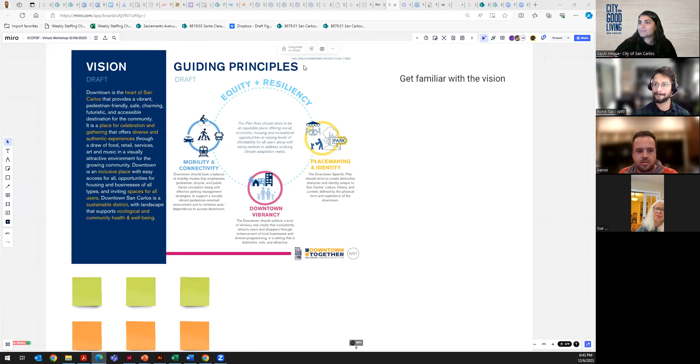Our vision is that we want to make sure downtown San Carlos is the heart of San Carlos City, and it provides a vibrant, pedestrian-friendly, safe, charming, futuristic, and accessible destination for the community. It is a place for celebration and gathering that offers diverse and authentic experiences through a draw of food, retail, services, art, and music in a visually attractive environment for the growing community.

Downtown is an inclusive place with easy access for all, opportunities for housing and businesses of all types, and inviting spaces for all users. Downtown San Carlos is a sustainable district with landscape that supports ecological and community health and well-being.

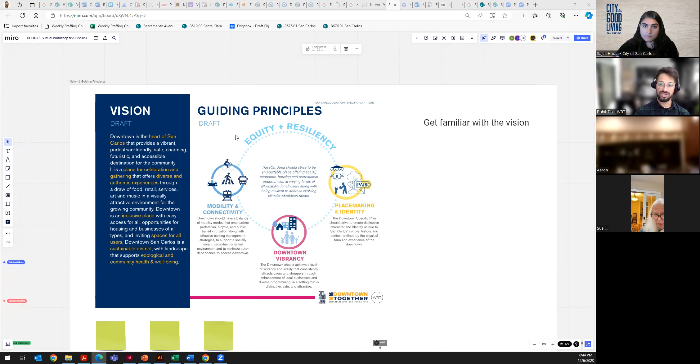This vision we summarized into four guiding principles, which include downtown vibrancy, placemaking and identity, mobility and connectivity, and an overarching theme of equity and resiliency across all three principles.

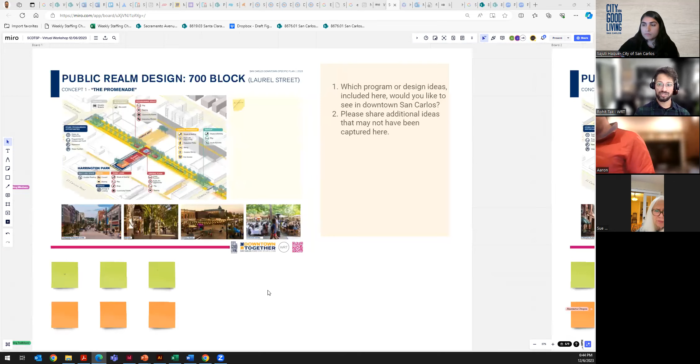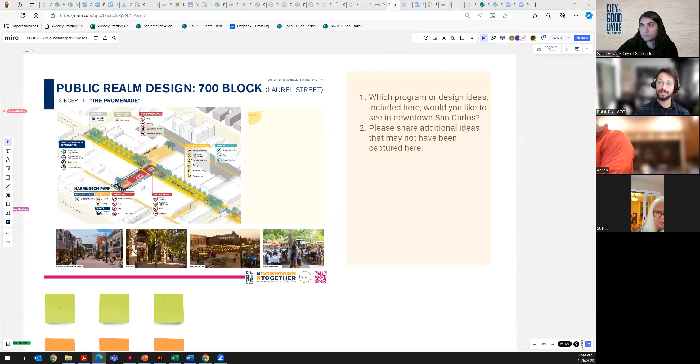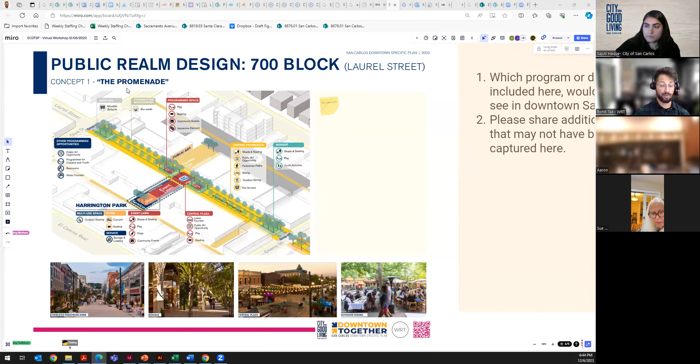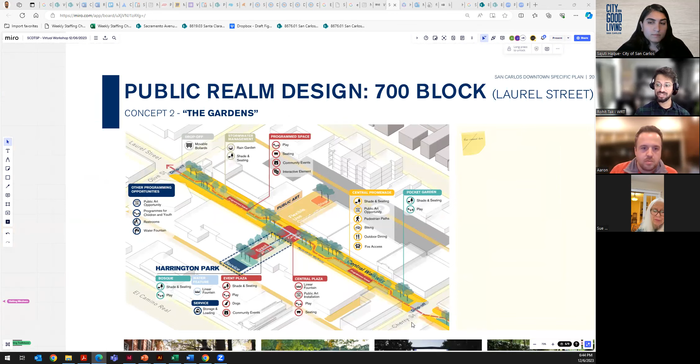To translate that into the physical space design, this slide talks about the transformation of the 700 block into a pedestrian plaza. As explained in the previous presentation, we have two options for the pedestrian plaza. First is the concept of creating a promenade, and second is creating a series of gardens within the 700 block, especially between Olive Street and Cherry Street on Laurel.

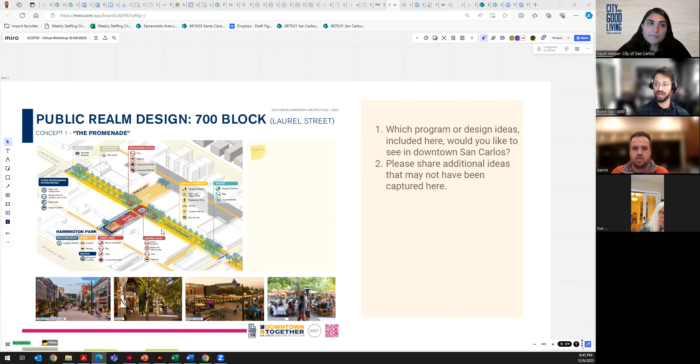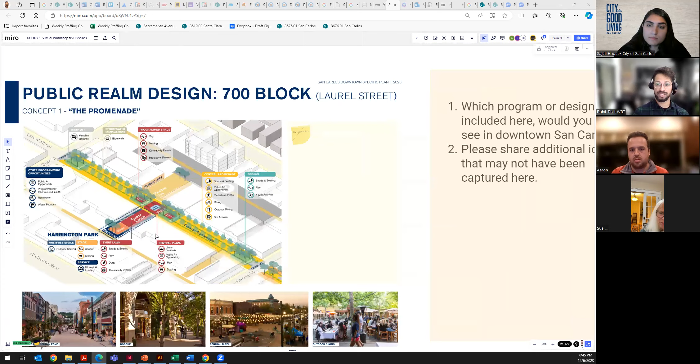I'll pause here, and we have a question for you to give feedback. Which program or design ideas included in this concept would you like to see in downtown San Carlos? And if there is anything missing that you need us to consider, you can comment on some of those ideas and activities as well. I'll zoom this in for the promenade concept. My note taker is Sajuti, and she will be typing all the comments and feedback you're reporting.

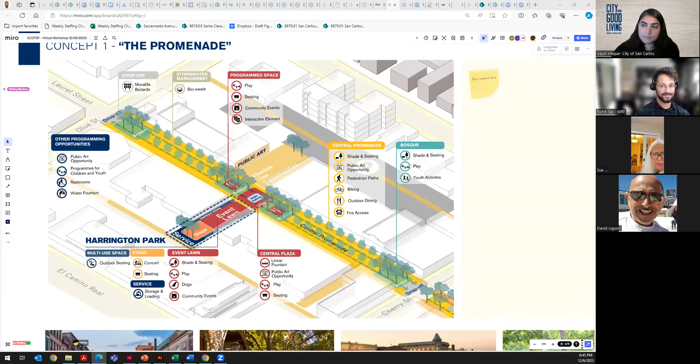This is David Liguori. Hi David. Hi, I hadn't thought about the tree grove idea down the middle, but seeing what you guys have come up with, some of these ideas, I really like that. It's really attractive, adding a bunch of green there and shade and interest down the middle, as opposed to just one long straight alley. Breaking it up like that is a really attractive idea.

As I mentioned a few minutes ago, with a 2-year-old, it would definitely be great to have some kid-friendly stuff along Laurel Street. The current Harrington Park is kind of dark and damp, and there's not a lot of good kid activity or infrastructure there for when we want to go down there as a family. That kind of kid-oriented and youth-oriented program would be something our family would be interested in.

Both good comments. Just to summarize, David's point was the shade factor introduced in these intermittent stages along the corridor is something preferred. And Aaron, to your point, wherever you see the play icon here, these are the areas where some child-friendly activities are being introduced to make this space inclusive of all ages, especially here along the park near the water fountain. But the point is noted—some programs where children can play and recreate could be introduced along the promenade.

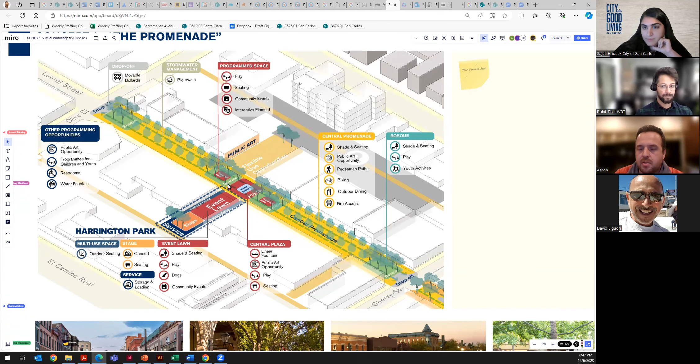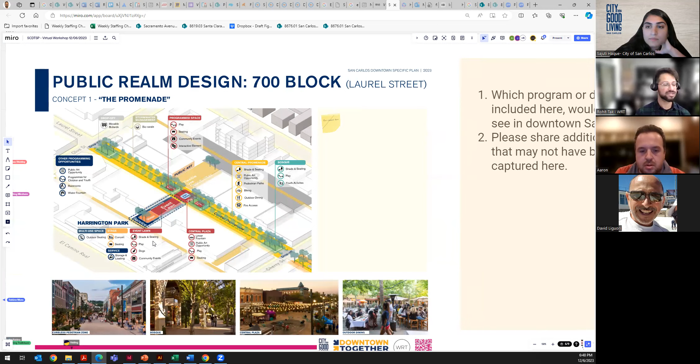Rohit, are we commenting on just the promenade concept right now? Yeah, so we have boards dedicated to different topics. For this board, we are commenting on the promenade concept, but if you have anything that goes in line with what we're discussing, please feel free to share.

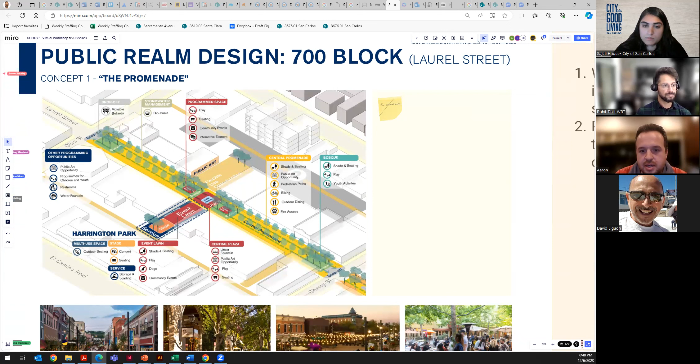This is David again. I like Aaron's idea about kids' stations in the promenade—little play areas scattered about where families can hang out with the kids. That would be wonderful. Our kids are just two, but I see lots of comments on Nextdoor about how there's no longer anything for teenagers to do. So if there was stuff that engaged youth of all ages, I think that might help create that kind of inclusive environment where people want to come hang out.

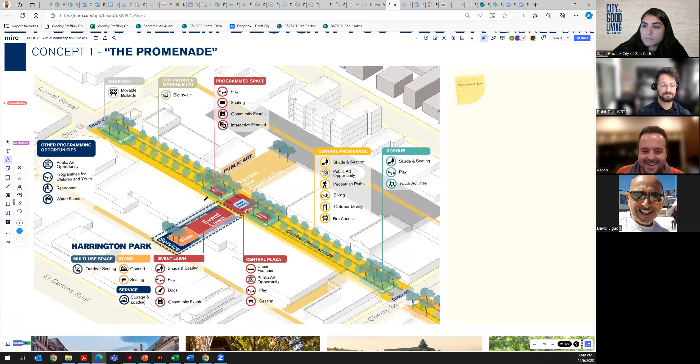You could put a boba tea kiosk in the middle of the promenade. Teenagers would love that—this lounging area, yeah.

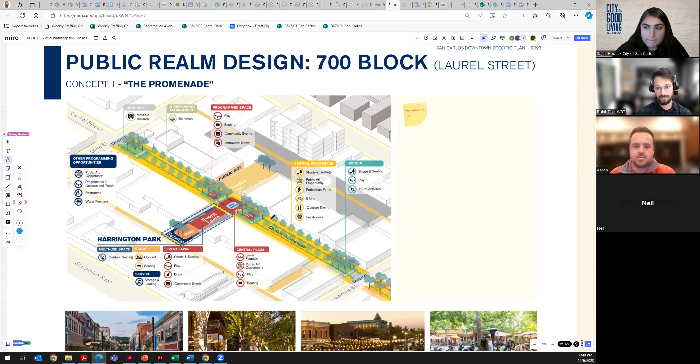As much as I'd like a lawn right there by the stage, I don't think it gets enough sun. There's a current lawn on the path that goes down the middle, and there isn't enough sun to even have that lawn. It's mostly dirt now. With the buildings on both sides, I just don't think you're going to get it there, so to have a real lawn, I don't think that would work.

So I think maybe move the lawn out towards the plaza more, and maybe a water feature in there or something. But again, I don't think you want a water feature without sun either.

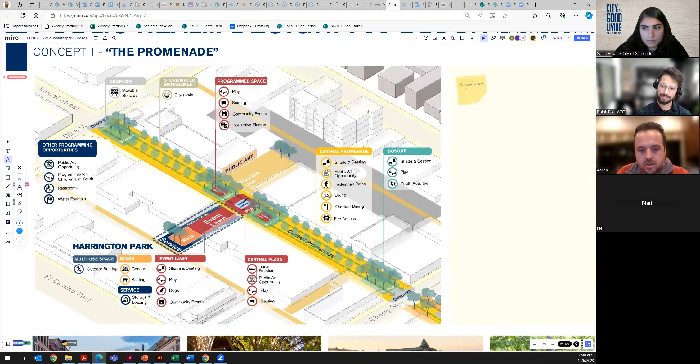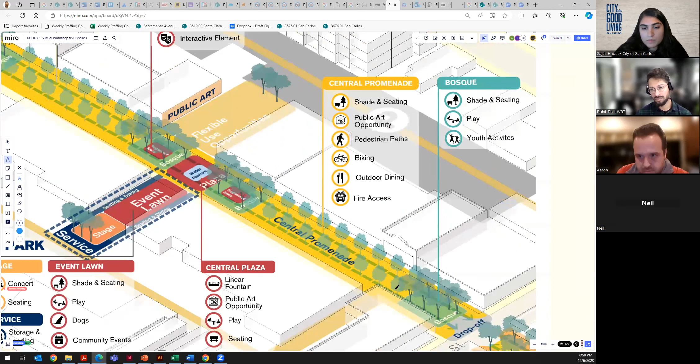With the shade trees along the promenade, you've got to be careful because too much shade, it gets cold, and we're not super hot all the time. So I'd cut back on the amount of trees, just so there are spots to sit in the sun and absorb that sun. Also, with so many trees, you get lots of leaves and that sort of thing, so I'd be curious to see what kind of trees those are, and make sure they don't get aphids like the current problem we have.

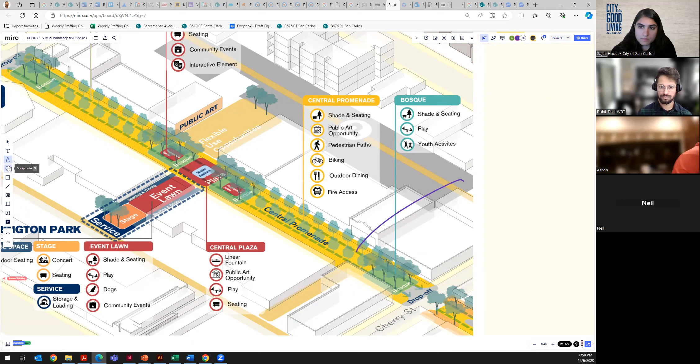I'm not sure what the surface would be either. It doesn't really go into the surface of the street from building to building, but I've heard things about using stone and rock, and you have to be careful about having a porous stone that doesn't clean well. You want it to look new, sort of like Disneyland every day, where somebody can come in and clean it. So just some things to consider.

Yeah, that's a good point, and we are going to give detailed thought to the surface treatment. At the moment, we are finalizing the broader concept, and then we will get into the detailing part of it. But those comments are really helpful, so keep them coming.

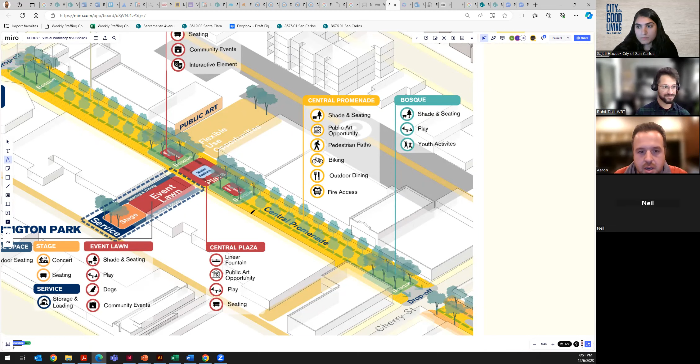Neil, you said it better than I did — that the current lawn space just doesn't get enough sun to be a lawn. It's dark and damp in there. I think you're exactly right. If there is going to be a lawn, it should be moved out where it gets more sun, and we agree to be careful about not having too much shade, because very quickly it'll start to feel cold there all the time.

I can move to the next board. I think some of the comments will continue here as well, because they were pretty relatable to this concept too, whether it's the surface treatment, the lawn, the trees and their density, the children's play area, or activities for youth, etc.

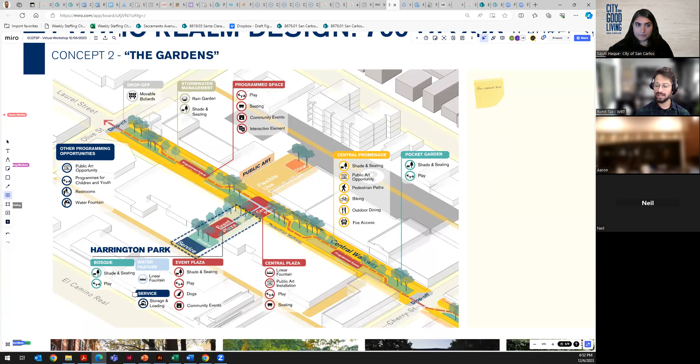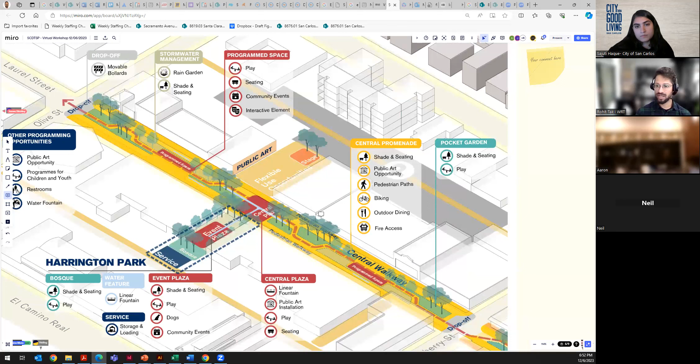Anything else on this concept? Here, as explained, we are trying to break the formality of the promenade and introduce these pockets. We call them the gardens along the plaza, to create a meandering walking experience within the green zones, which can also act as cooling zones when it's really hot. So if you have any other comments on this concept, please feel free to share.

Does the city have the funds to pay for all of this?

That's a good question. I can certainly note this down, but the city — we have Sajuti here from the city. Sajuti, do you have something to add here?

Yeah, that's a great question. So when we finalize the specific plan, it'll be done in phases. Currently we do not have the funds, but it'll be considered through both — if private businesses want to make improvements, they can contribute to some of those funds, or it'll be a capital fund included in our budget. That'll be the next phase once we figure out what exactly will happen, but we can get you more information on that.

That would be good. My brother and I own one of the buildings in the 700 block, and it's been very hard on our 20-year retail tenant who's a fixture downtown. We were quite against this. His revenues have been so low that we've in turn accepted like half of the market rent for the property.

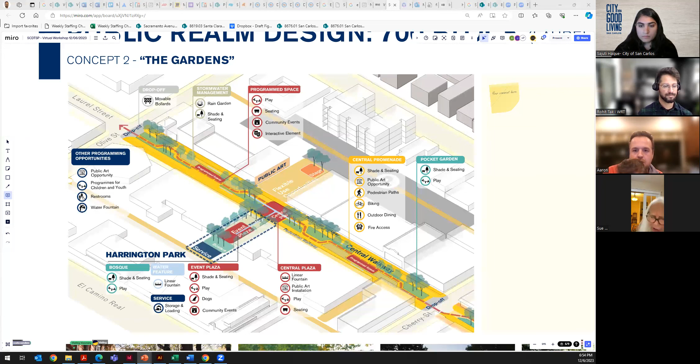Some people are getting hurt by it, but it's really heartening to see all the thought and planning that's gone into this. If there are public funds available for it, that's really nice, but some people are going to suffer from it. I'm also concerned for the people that live on Elm Street, for the character of that street to turn into a thoroughfare. I'm a little worried for them and their property values. That's just a couple things — I mean, it looks like a beautiful thing that you're doing.

But I do have a few concerns. Sure, so we noted those down, and you have some really good inputs.

We are going to discuss the circulation slide, so we can talk about Elm Street at that point. But to come back to your first comment about phasing, one of the exercises we will be doing once the design is finalized is to phase out the development within the downtown and even on the plaza. Different aspects could have a timeline for implementation of the design. For example, planting trees could be the first phase, and creating the gardens in this particular concept, if this gets picked up, could be the first phase. Second could be creating the curb and surface treatment on the street. So we can phase out the development to achieve the vision.

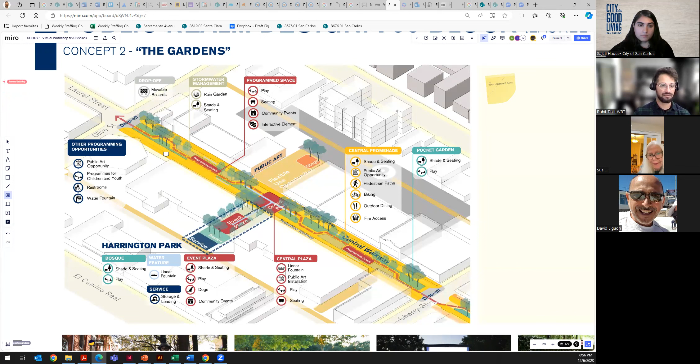I'm glad you pointed that out for us to also consider. We have noted that comment. Anything else on this concept? If you like any aspects or anything else you want us to consider.

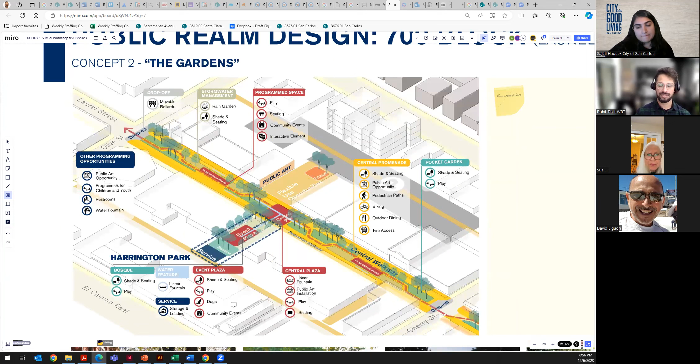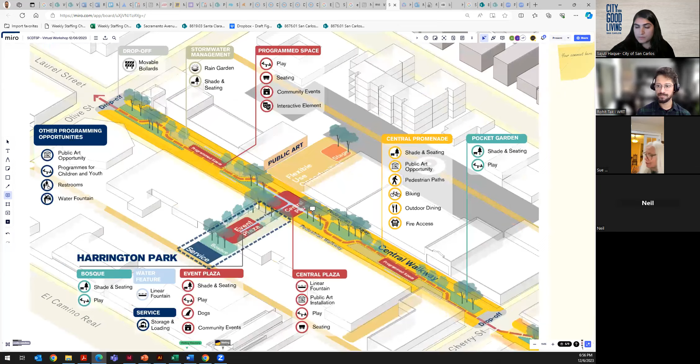Well, this one does have less trees, which is good, but the trees right in the front of the event plaza, there's like 3 trees there, I think I would do away with. Again, those would be blocking the sun coming from the south, so to speak. So I think I'd like it more sunny, but this one does have less trees than the promenade concept.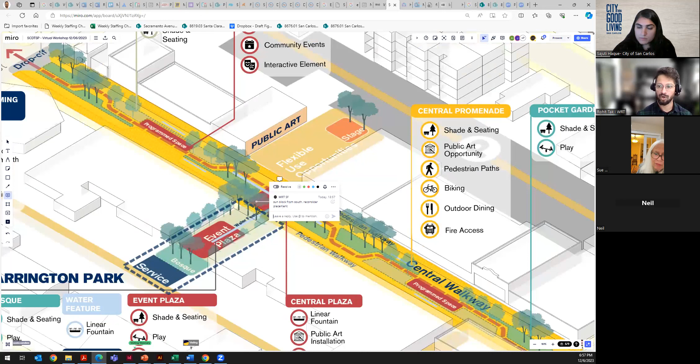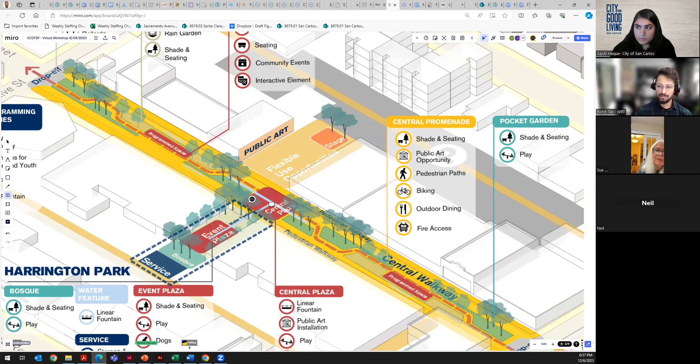So I think this one would go better as far as that. And it's sort of nice to wander through on both sides, but I just worry about, I guess there's still a sidewalk on both sides, and then there'll be a sidewalk down the middle. Is that how I see it?

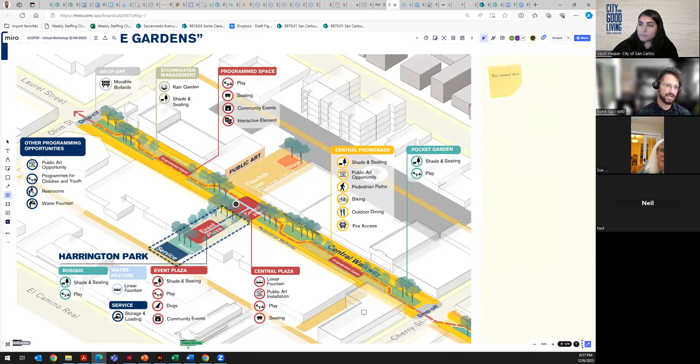So this is curbless, so everything is a pedestrian kind of zone. There is no distinguishing factor between what is sidewalk and what is thoroughfare, because the entire thing is planned as a plaza. There are labeled pedestrian walkways on each side where the sidewalk would typically be. Oh yeah, those are dedicated as pedestrian walkways, but the movement inside is also pedestrian.

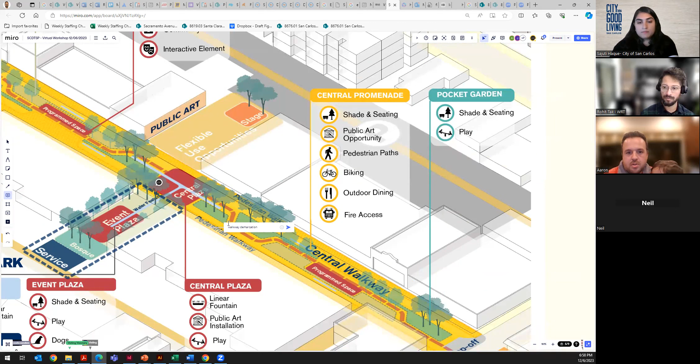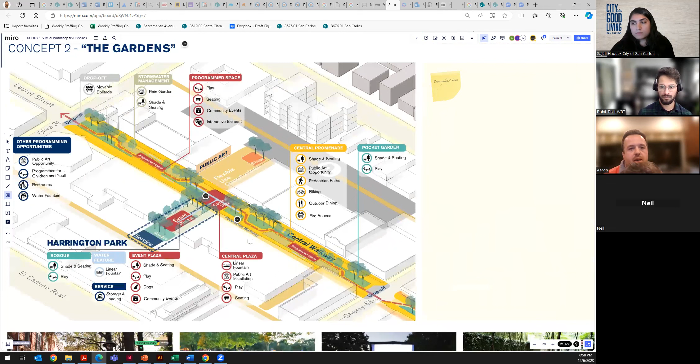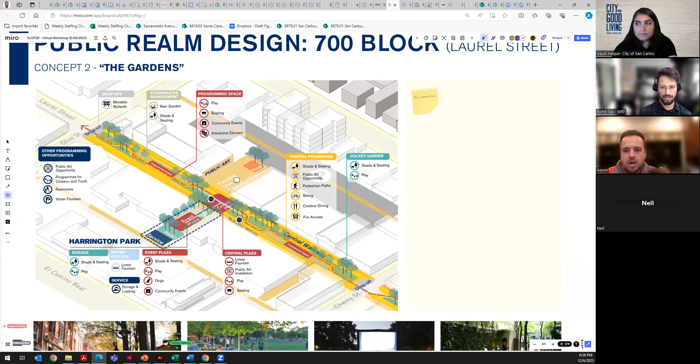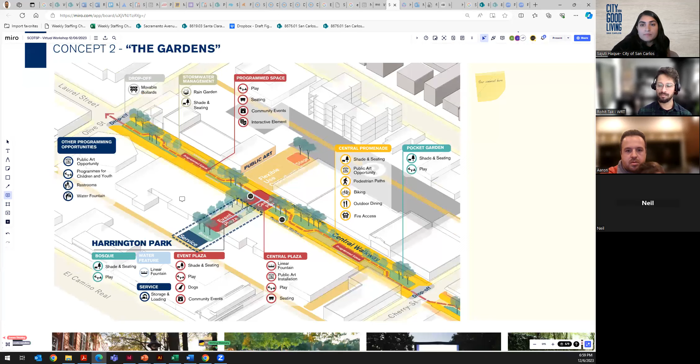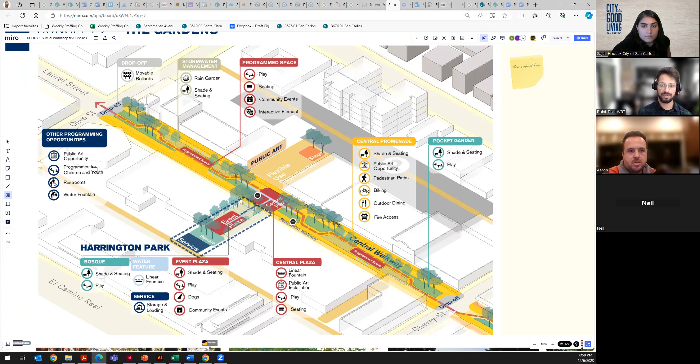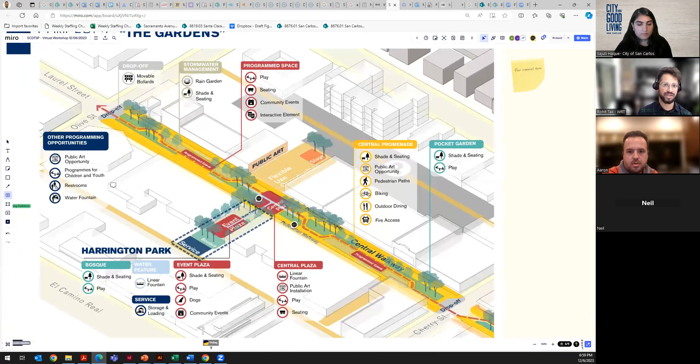Got it, so multi-purpose areas, and we're gonna get to that as well. Just to summarize this, we did discuss the phasing part, the placement of the trees, some walkway demarcations, and areas for everyone, including flexible use or multi-purpose areas to be considered. One thing I wanted to highlight was we included some amenities like water fountains and restrooms, because if we are creating such a plaza space, the basic bare minimum we have to provide are restrooms and water fountains, along with other interesting uses we are proposing. So those amenities have been factored into the planning.

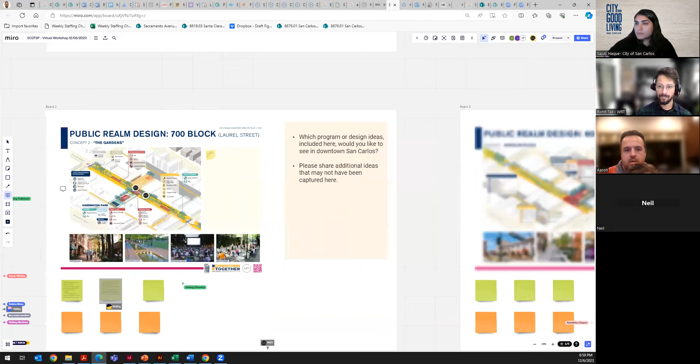Now I'll move. Sorry. Glad to hear that Sue's the expert here, so it's great that she commented, and I'm going to defer to her every time here.

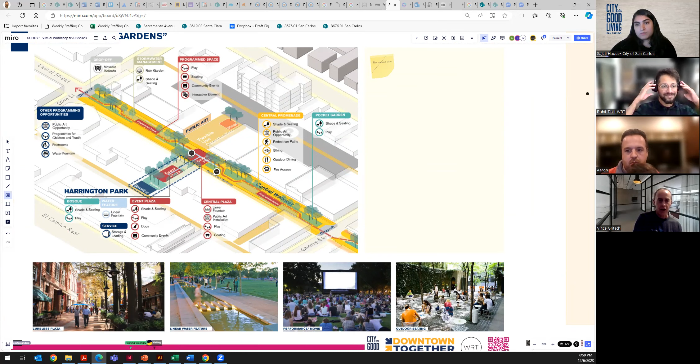But look, the garden concept looks better, I think, because of the difference in the types of things. It makes it seem less like an alleyway. Question is, have the local businesses there that are affected been consulted? When you do something like this, clearly there's different frontage and different frontings for different businesses, some are open, some are not. There's a long history, Sue's gonna be the expert here, of San Carlos on Laurel Street with a problem with trees because it blocks the signs of the merchants, and I think they've complained about that for many years. So it's something you're gonna have to be aware of.

The other one would be, is there going to be an adoption of standards for the areas that restaurants and businesses are going to occupy in this plaza? Because today, Laurel Street, let's face it, looks bad. When you compare it to other cities, those orange barriers and just the mixture of random, completely random parklets and whatever the hell they are, looks terrible.

So some kind of adoption of standards is going to be a necessity if you're going to make this thing work and look at all okay.

And then you get to the equality for the other businesses. So if this is being done for restaurants here, it certainly creates an unfair advantage for them versus those in the 600 block, 500 block, 400 block, 300 block. I don't know if that's up to the business owners to deal with, if it's up to folks like Sue that own the real estate, but would the city be charging people in this area for maintenance for their areas?

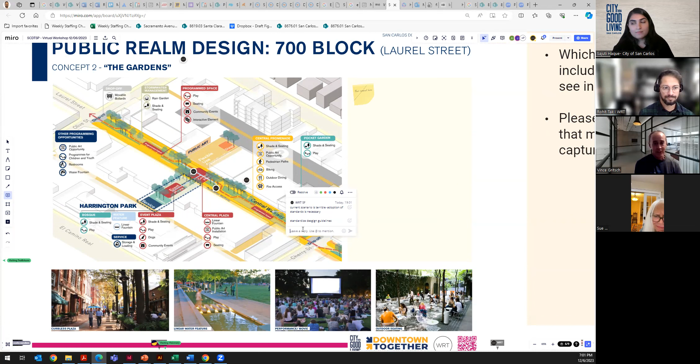Sue, you've lived this, sounds like, for many, many years. So there's a lot of things that you guys are going to have to get into that are going to affect this.

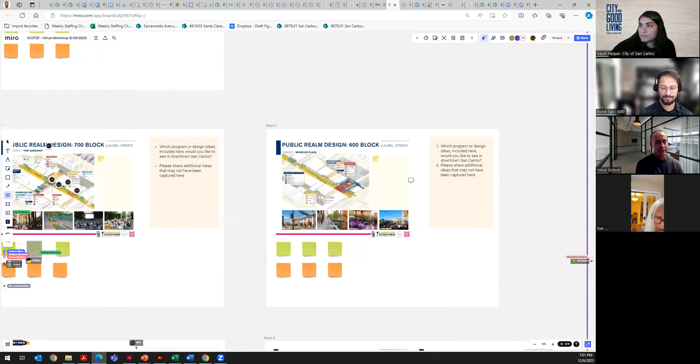I would also, last point, agree on Elm Street. Using that as a thoroughfare is just, I think, a pipe dream. That street is not designed for that. It chokes today with just two-way traffic because there are cars parked on the streets. To create that as a thoroughfare is a dream.

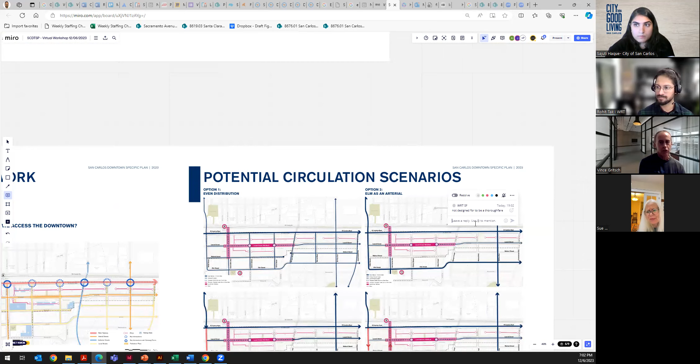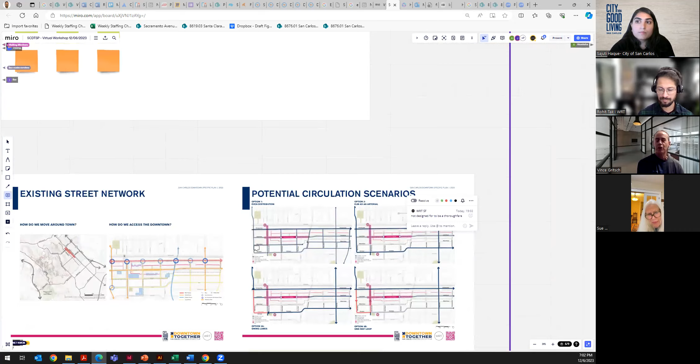Choking down El Camino, again, I would advise you to take a drive through Menlo Park almost any time of day, and where it chokes from 3 to 2, it is a traffic difficult situation, shall we say. So lots of things here that you guys are gonna have to work through that are gonna make devils in the details, but there's a lot of things that just throwing up some barriers and converting it to a plaza is going to take a lot. It's going to take a lot more than that.

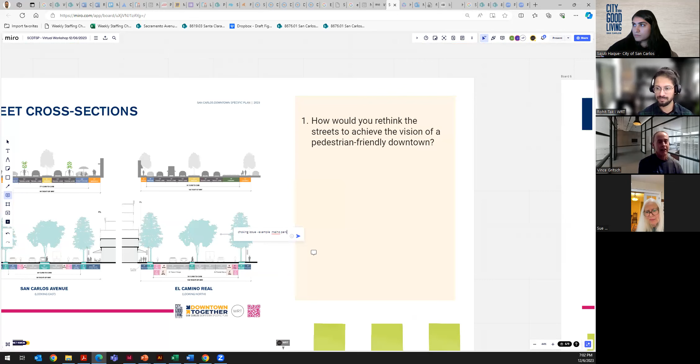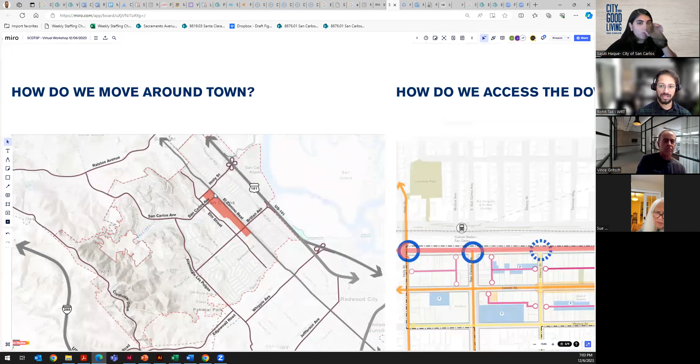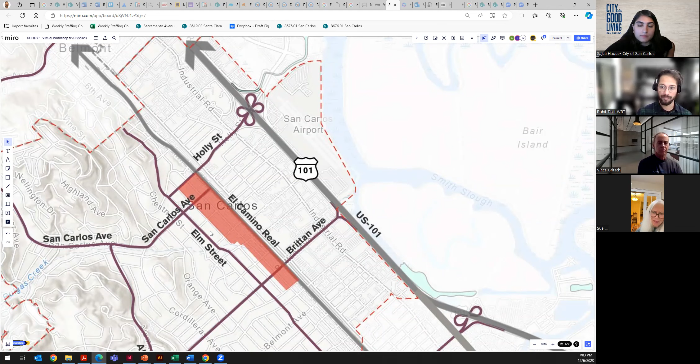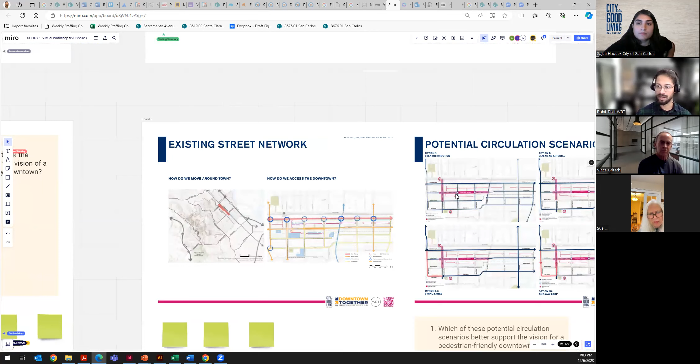Great points, Vince. I've noted those down. We did discuss about Elm, we did discuss about El Camino here. And yes, we are talking about the plaza, but the reason why we are looking at the entire network is because we want to make sure that whatever is happening in this little part is in consideration of all regional movements, city level movements, and access to other areas. Because all these streets are cutting through our project area, but they are giving access to the regional connectivity. So we did factor in that, and your points about Elm, both yours and Sue's points about Elm are very well noted, and we will consider those when we are talking about mobility and connections.

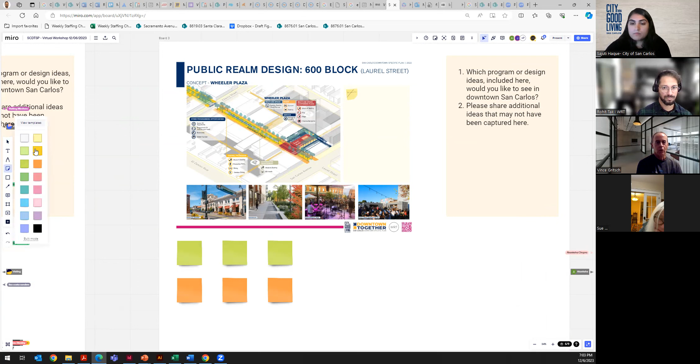Yeah, I assume there's a business study here. Again, Sue's made the point that her tenant has seen a drop. Now clearly that was due to pandemic things, but I don't think in the retail space it's come back. Sue knows better than anyone. And in the restaurants downtown during the week, they're deserted from a daytime perspective. So again, the challenge is San Carlos doesn't have a business culture around the downtown that empties people into it at lunch.

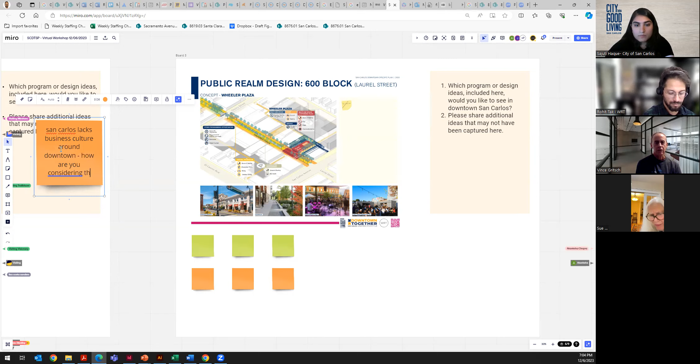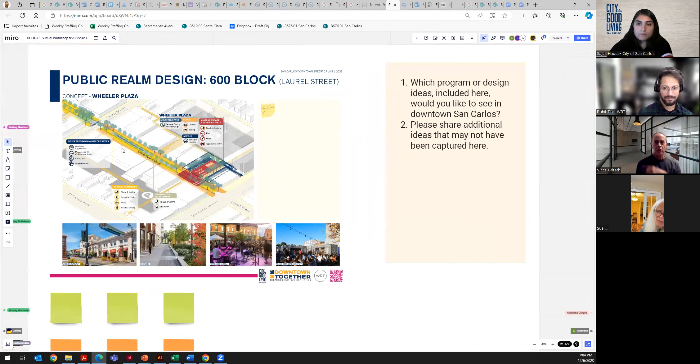So I'm hoping you guys are doing some business studies here, some traffic studies as far as people goes, that today's modern city is designed with more of a mixture of residential, business, and retail combined in its downtown to drive that kind of activity. San Carlos wasn't done that way. It's filling in on the edges. The residential has been now created across El Camino next to the tracks, and somewhat in the project over on Elm. The businesses I don't think are there at all.

Samtrans I think is gone pretty much. So you don't have business traffic that empties into this space in the daytime to support these. So I don't know how, great points more, longer term planning to try and create business spaces that would feed into this. That's a long-term project, obviously.

So what kind of businesses are benefiting out of it, and how, in spite of conversion of the pedestrian plaza, their street is able to achieve economic vitality and diversity of businesses are still functioning. And if something is not functioning, then why is it not functioning? So both pros and cons of these different cases we are studying, and then we will be coming up with a business model for the businesses, or an ideal mix of businesses, to make sure that the plaza as well as businesses are thriving with this move, and we are not neglecting any of those businesses.

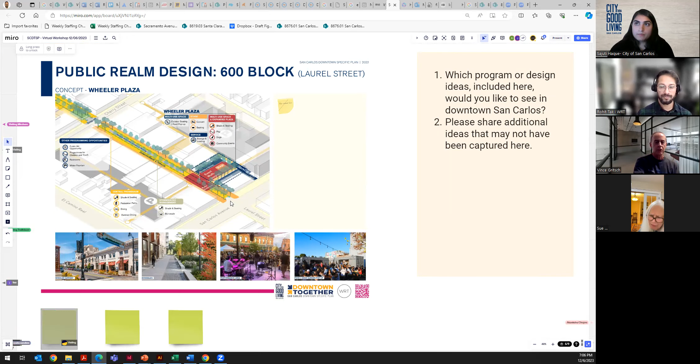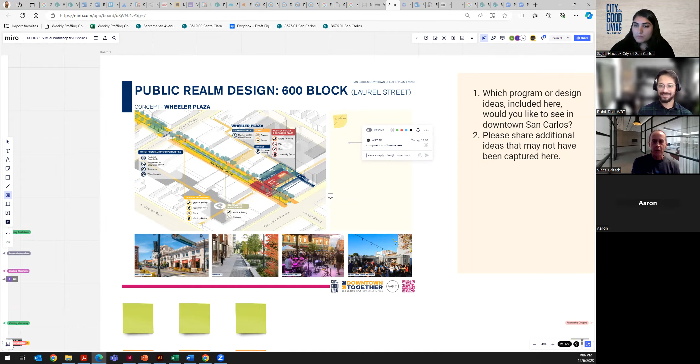Can be interesting to have a little more detail on the kind of business and why the interest has been there for them. In terms of what the business consultants are looking at, there's a lot of life sciences towers and office towers going up in the surrounding areas. So maybe there are ways to look at how you get that traffic coming down to Laurel for lunch, for example. That development is going on somewhat away from this plaza, so that needs to be taken into account. How do you get that to mix together somehow? In the next 10 years, that's thousands of office workers who are potential lunchtime customers for Laurel Street.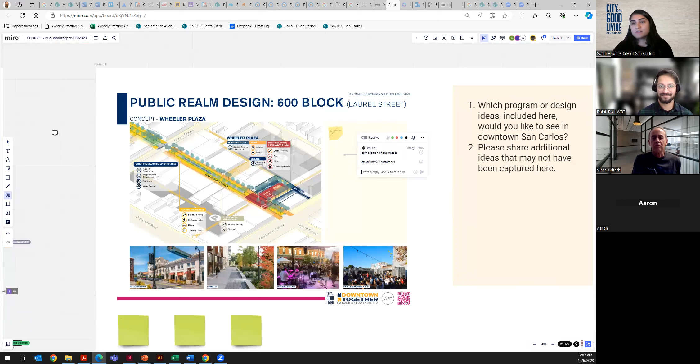So you're talking about the east side. We have the east side vision plan, we have the northeast area plan, so those plans are kind of considering the connection between the downtown and the east side.

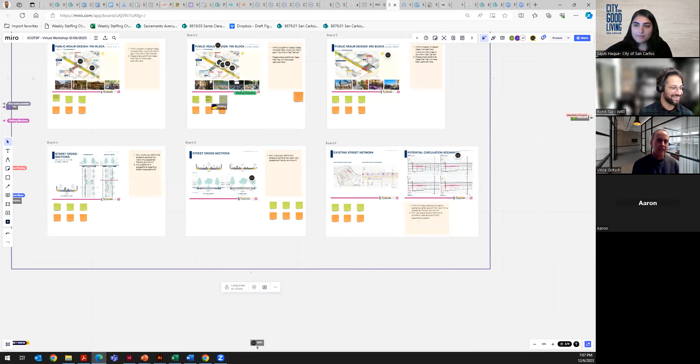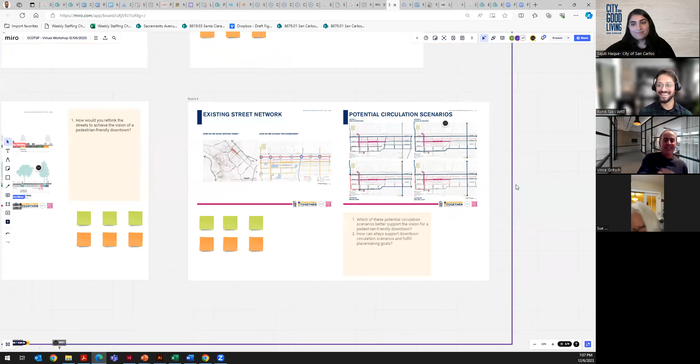So you can nominate somebody now as we speak, either Vince or Sue, because I see both of you. I nominate Vince. No, I'm saying Sue. Sue has a vested... Thank you. No, Vince, I've moved out of the area 20 years ago plus.

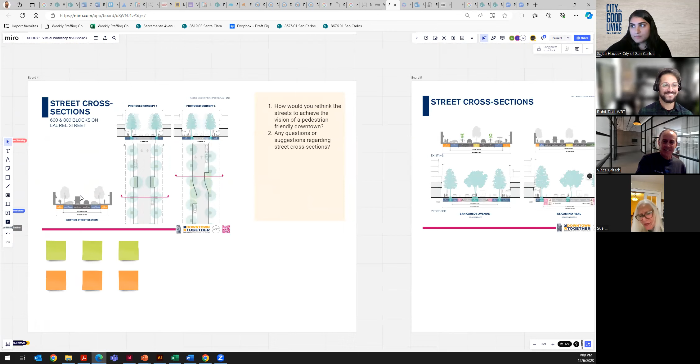I was so blown away by how many restaurants are down there. This plan is so well suited for restaurants. I worry about the retail people.

You're 100% right. And people that have those businesses, to your point, the parking has to now be behind in the alleys and such. They're the ones getting impacted the most, I think. The parking is just terrible, and we can't take away any more parking, in my opinion, unless we have another plan.

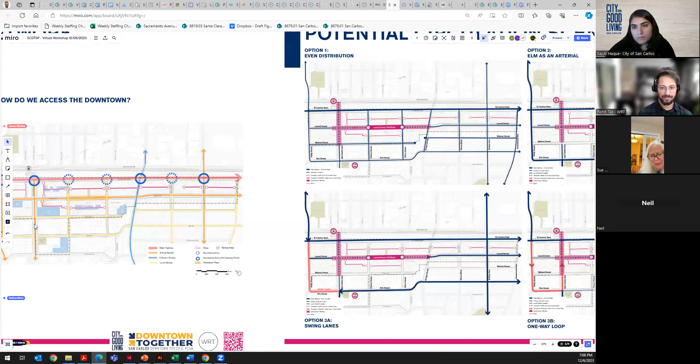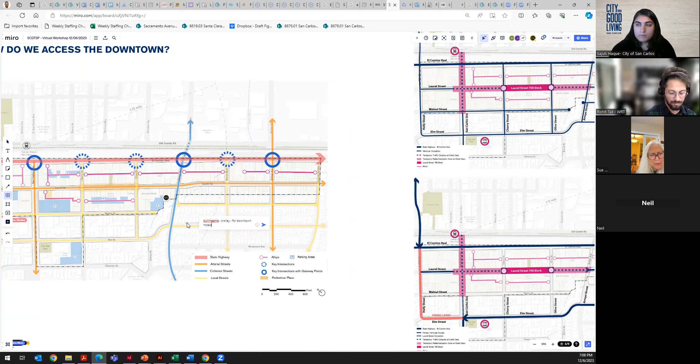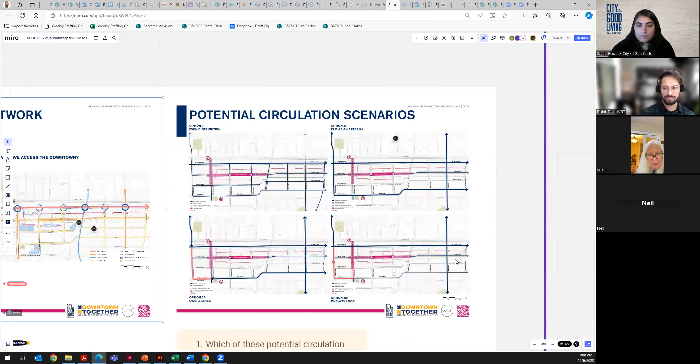Maybe you're talking about bringing people from the east side. I know Burlingame has a trolley that goes to all the hotels, like every hour. It goes to all the hotels on the east side of the freeway, takes them to downtown and back, just keeps going and going. I have a lot of friends that stay in those hotels, and they hop on the trolley to go to dinner in Burlingame. It's really convenient, and we might want to consider something like that for these high-tech workers where they're at. It might be worth a try.

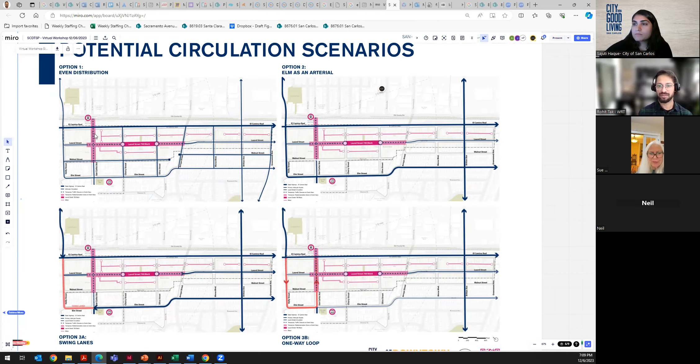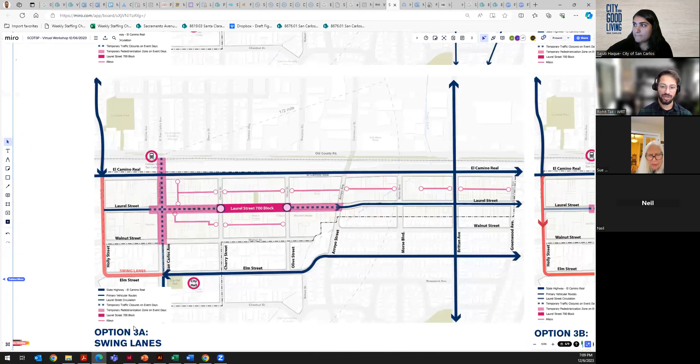Point noted. I'll hop onto these scenarios because here we'd like your inputs. We did discuss the option of Elm not being favored as an arterial street, but we do have other options where we're talking about swing lanes, especially on Holly and Elm.

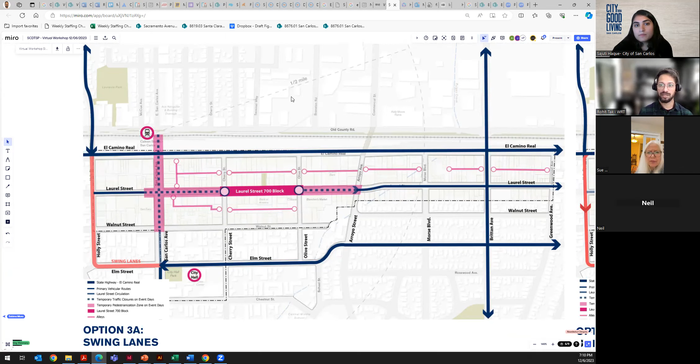Because we have peak hours, and in our transportation analysis we figured out what those peak hours in the current movement pattern are, maybe in the morning peak we can have Holly Street flow in one direction, and in the evening in the other direction, considering the flow of traffic. That could be one option to consider, especially as this becomes a pedestrian street. It will be in line with our vision to create downtown as a pedestrian-friendly urban environment, while still considering traffic movement, so both things can work in harmony. That was one option, and the other was to create a one-way loop.

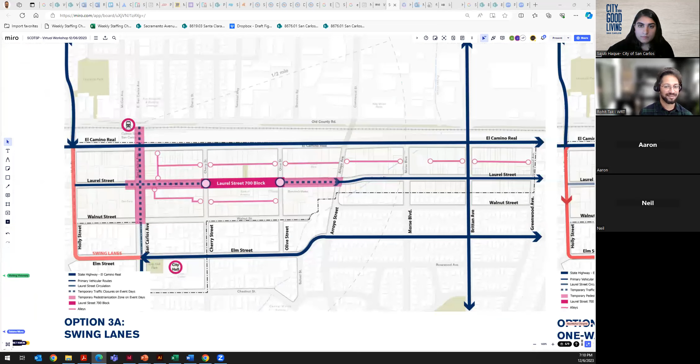Our breakout room's about to close here. Kind of an overarching comment on all of these plans: I live in San Carlos and work in San Carlos, and I drive through this area every day twice. None of this fixes the problem, which is the intersection of Holly and Old County, because that holds up traffic. Even the one-way loop, option 3B, I'm a hard pass on that because the traffic builds up trying to get through under the train there. Until you fix that, like literally adding another lane or a swing lane or changing that light, none of this resolves that.